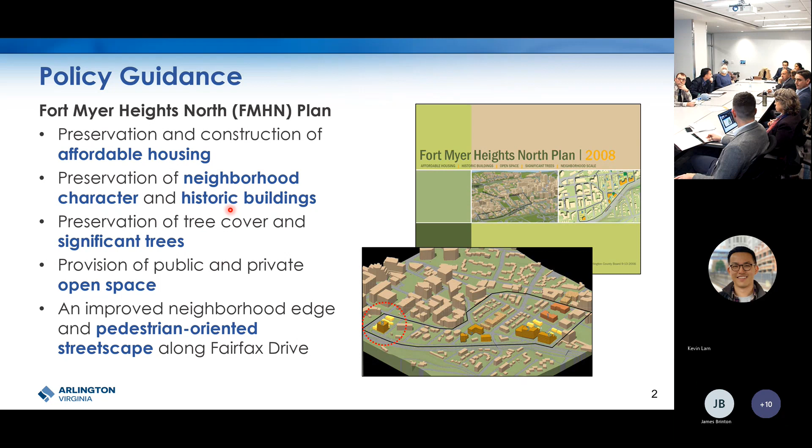The plan was adopted in 2008 and arose out of concerns that new development was eroding the unique fabric of this community. As a result, the plan has several overarching goals, including preservation of affordable housing, neighborhood character and historic buildings, and preservation of trees and significant tree cover. It also calls for public and private open space, as well as an improved neighborhood edge and pedestrian-oriented streetscape along Fairfax.

The project is identified as Block 8 in the plan as likely to redevelop. It's recommended that the 3 historic properties currently existing on the site are preserved. As part of the original site plan approval, the buildings were indeed preserved in exchange for a transfer of development rights. The plan notes that given the limited developable area on the block, flexibility with regards to other plan and county recommendations may be needed to make redevelopment of this site financially feasible.

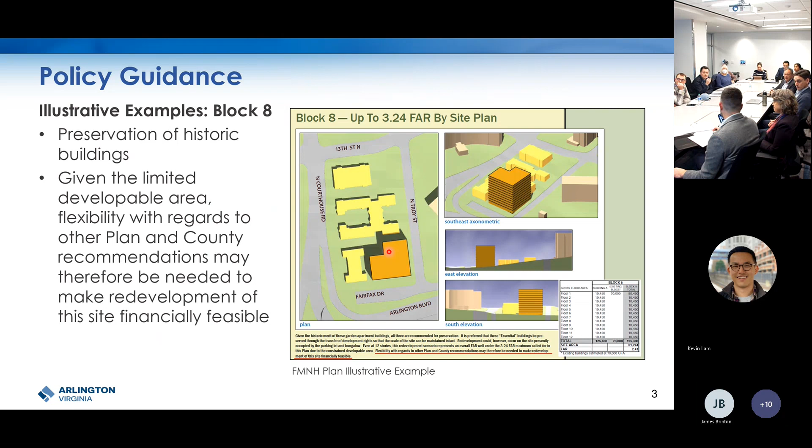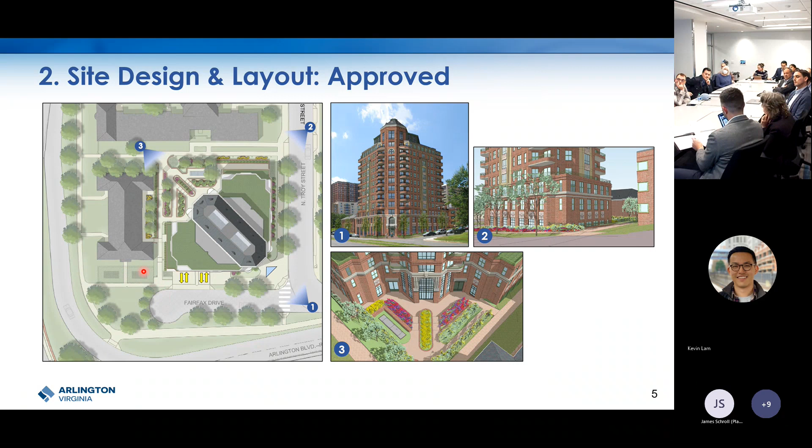Here is the approved site plan layout. The approved site plan was oriented towards Fairfax and Troy, with the main entrance located on the street corner. Parking and loading access was off Fairfax Drive, with walking paths surrounding the new building. An at-grade terrace garden was located in the rear of the property and sloped down towards the new building, providing direct access out of the new building north towards the courthouse area and the metro. Other features include sidewalk improvements around the entire block, as well as reconfiguring the existing Fairfax Drive dead end area into a cul-de-sac. The underground transformer vaults were to be located here in front of the Wakefield Manor building on Fairfax Drive.

The proposed building is oriented in a similar fashion, with the main entrance also located at the corner. There is parking loading access off Fairfax Drive, as well as an additional parking access point on Troy, exclusively for the mezzanine level parking. Unlike the approved plan, the applicant is proposing an elevated private terrace located on the second level, which doesn't have direct access to the ground level. The applicant is still providing the sidewalk improvements around the entire block, as well as the Fairfax Drive cul-de-sac, and the underground transformer vaults are located in the same location, but this time enhanced with landscaping and hardscape.

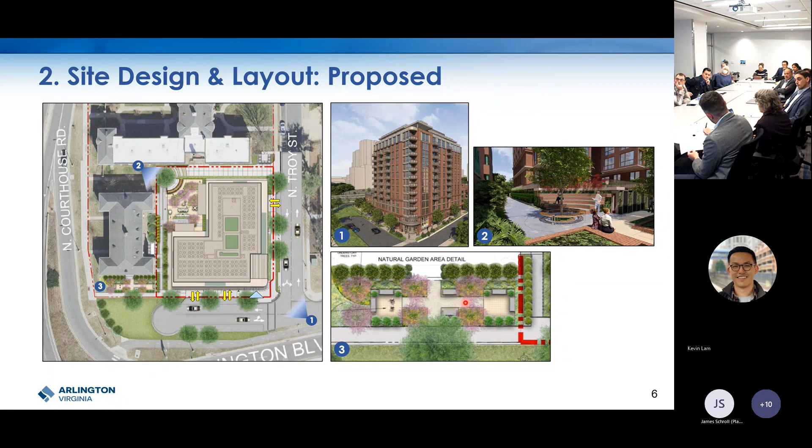Another key component of the plan are the design guidelines, which include recommendations for new development being inspired by colonial revival or Art Deco styles. They should include appropriate tapers and setbacks compatible with the neighborhood scale, and new development should also incorporate step backs along Fairfax Drive of at least 15 feet starting at the 4th floor. Here are some images of the existing properties.

So we have Courthouse Manor, and then the Wakefield Manor properties here. As you can see, these buildings have a lot of architectural detail, but are also characteristic of the low-rise garden apartments in terms of massing and scale.

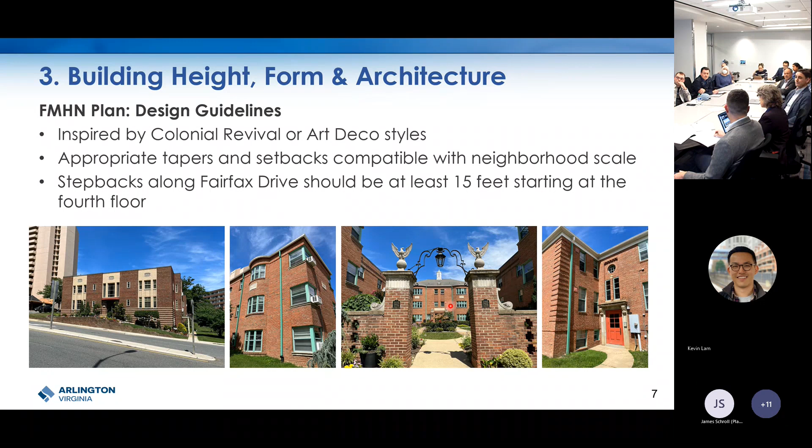So this next view is looking west. Fairfax Drive is located here. On Fairfax Drive, in both cases, there is no 15-foot step back above the 4th floor as recommended by the plan. On Troy Street itself, the approved site plan has a 30.5-foot separation followed by a 5-foot step back.

However, the proposed building instead only has 18.5 foot building-to-building separation with no height transitions down towards historic properties. While the plan is not explicit in how much distance there should be between buildings, it does recommend new buildings provide appropriate tapering down to lower scale buildings and setbacks compatible with the neighborhood scale. Staff have raised concerns about the new building being sited too close to the existing properties, especially on Troy. It even deviates from what was originally approved, as well as the lack of a step back.

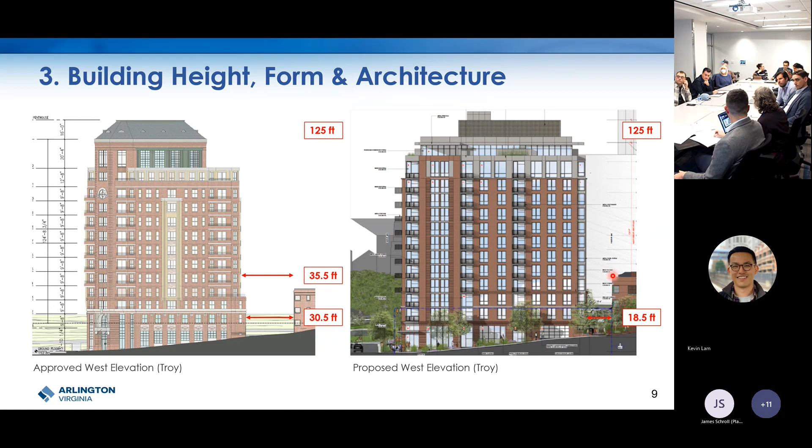So here I wanted to illustrate the point a bit further. For visual purposes, I pulled a few examples of building separation between recent new development and garden style apartments or townhomes. The first example is Union on Queen, also located in the Fort Myer Heights North area, which has a building-to-building separation of 32.5 feet with a step back above the 5th floor. Next we have Sedona Slate, located closer to the Rosslyn area, which has a 29-foot separation with no step back.

And then finally, we have 672 Flats located in Ballston. This project has a 22-foot separation between the new building and the adjacent townhomes. Also, it has a step back above the 1st floor. And I just wanted to note this driveway width here is 12 feet.

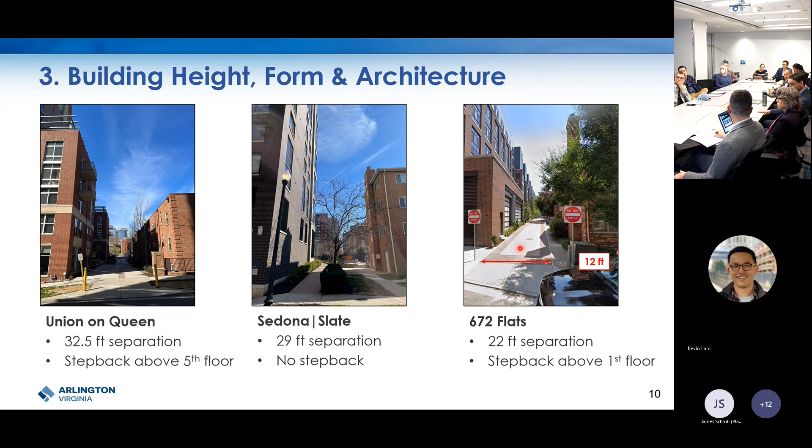So another component of the plan are recommendations for open spaces and significant trees. Per the plan, open spaces should evoke the garden apartment aesthetic of open lawns and trees. The spaces should be clearly viewed by residents and passersby, creating a sense of openness. It also strongly recommends the preservation of significant trees or their replacement per the county guidelines.

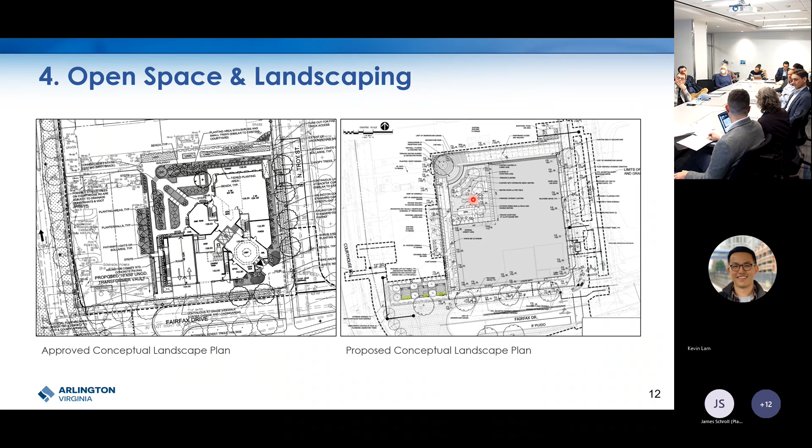Taking a closer look at the proposed courtyard, it's approximately 2,400 square feet. It includes seating, some outdoor grills, and planter beds. And from this view, you can see the courtyard is at least 7 feet above the ground elevation on this side.

So overall, especially compared to the approved plan, staff are concerned the proposed elevated courtyard does not meet the intent of the plan guidance related to creating a sense of openness and keeping with the garden apartment aesthetic. Staff are looking into ways to further soften this edge and increase permeability with the rest of the site.

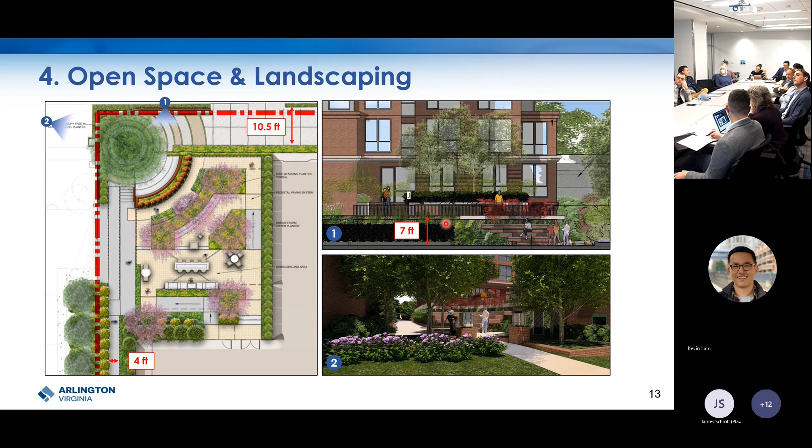Thank you very much. My name is Andrew Painter with Walsh Colucci, working with Fortis on this 4.1 site plan amendment. We're pretty excited to be here tonight. This has been a long time coming, not only for Fortis, but to actually realize development on the site in accordance with the Fort Myer Heights North plan policies and bring this project to fruition. Matt Bunch is the vice president with Fortis, and I thought I'd ask him to share a few words about the work he's been doing with the property owner and some of the issues we've been facing.

Yeah, thank you for your presentation. We're very excited about this project in the neighborhood. We think it's a wonderful block, and we think it's an ideal location within the county for new transit-oriented housing. As we've alluded to, it is pretty uncommon for a project in the county that's approved for multifamily to not get built for over a decade.

So we've understood the challenges that have prevented this project from moving forward, and we've gone into the process eyes wide open. We put together an excellent design team over the last 2.5 years, working through various obstacles that prevented it from moving forward. We think we've come up with some creative solutions to finally bring it to fruition, and we look forward to working with the community to get this project over the finish line. So what I thought we'd do is have a bifurcated presentation.

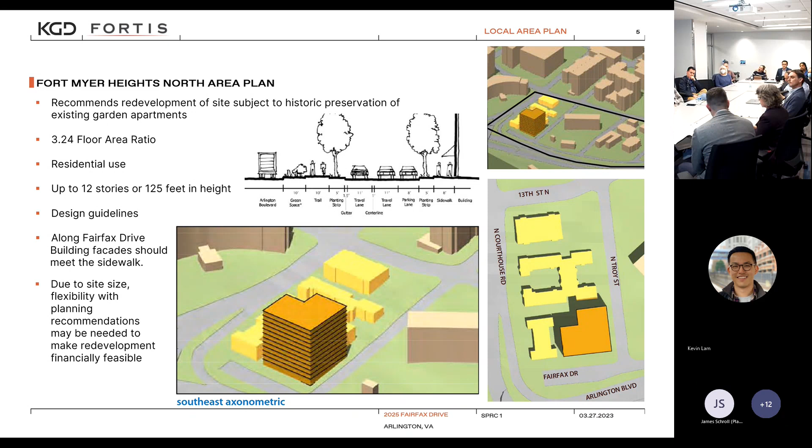There are a series of design guidelines Kevin mentioned, such as orienting the building towards Fairfax Drive, incorporating colonial revival and Art Deco elements, and open spaces responsive to passersby, mainly on Courthouse Road, Fairfax Drive, or North Troy Street. At the bottom of the screen you can see the axonometric image - the massing has always considered this shape and height, which our proposal seeks to replicate. That's the guidance we're trying to meet.

What was approved back in 2011 was a 12-story building, 104 units, about 105,000 square feet of residential GFA. It included the historic preservation of the existing buildings and the transfer of development rights. There was about 4,700 square feet dedicated to on-site affordable housing.

Under the Fort Myer Heights plan, anytime you take it through a 4.1 site plan, you have your base affordable housing contribution, and then a special on-site affordable housing contribution - in this case 4,700 square feet. In most 4.1 site plans there's bonus density, providing an additional opportunity for affordable housing. But what they did in 2011 was back into the amount of density so that there was no bonus density, meaning no additional community benefits above the base contribution amount. That was the extent of the affordable housing contribution.

There were a series of problems with the prior approval. Fortis has gone through a series of geotechnical studies, looked at the topography and the size of it. As we mentioned in our initial video, there are issues with significant rock deposits and granite directly below the site - something you usually see in Rosslyn, but it's here too, which makes excavation and blasting very, very difficult.

There are a series of utilities running along the Fairfax Drive frontage that have to be relocated - a spaghetti of different wet and dry utilities. There were issues with the interior layouts of the proposed building and the exterior facade elements, which were not environmentally friendly. All of this contributed, we think, to the building not being financially feasible to construct.

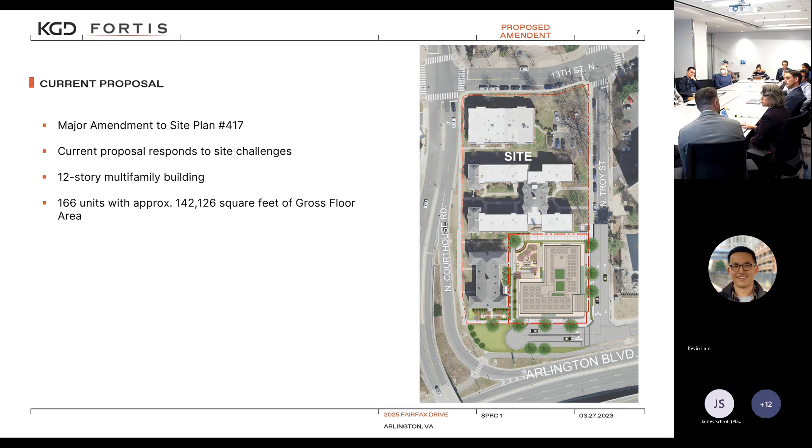166 units, 12 stories, just like the prior one. There is an increase in density from 105,000 square feet to 142,000 square feet. And we do seek to respond to a lot of the site constraints that we've identified. So with that, I'll turn it over to Tylene for a walkthrough of the design and massing of the building.

Hello, it's a pleasure to be speaking with you tonight. So we'll start with sustainability. We are working under the new Green Building Incentive Policy.

So we will be meeting LEED V4 new construction gold with 20% energy benefits and all the other prerequisites, including the EV parking and EV ready, bird-friendly materials, biophilia design, and Energy Star and WaterSense appliances and fixtures.

We will be going for a bonus FAR of 0.35 with 3 extra items, which in our case will be the envelope commissioning and air leakage testing, building life cycle impact reduction, and the procurement of off-site solar renewable energy -- 3 points, because we have a very small, tight site.

So this is the site plan you've seen -- slow, but there you go. You've seen this already in Kevin's presentation, and so I will just keep on moving.

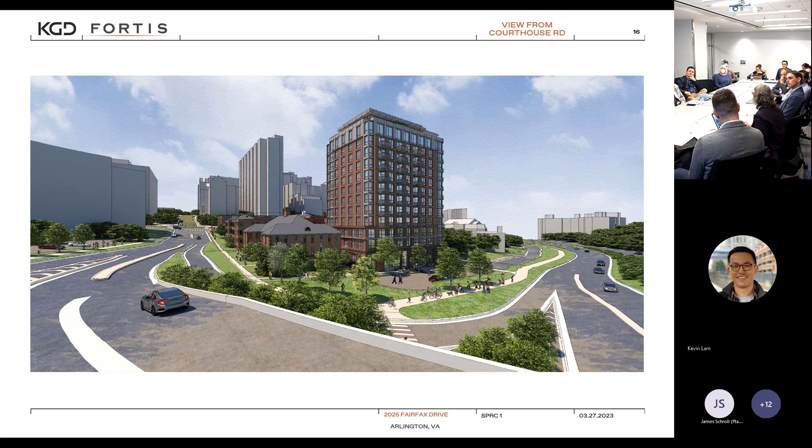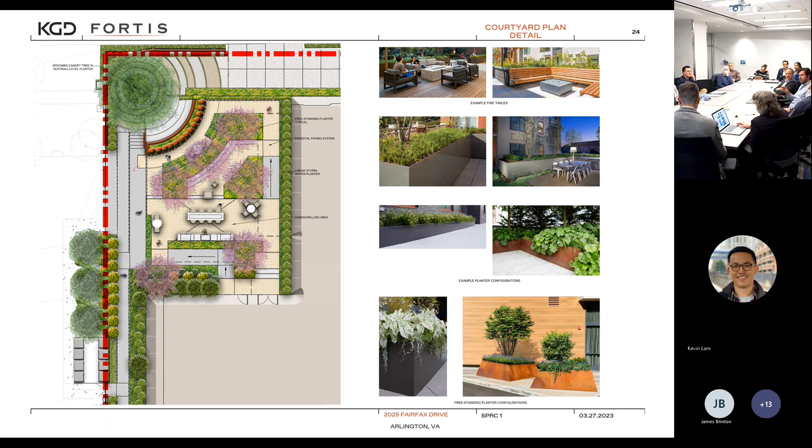I have a clarifying question about the parking—instead of 30 parking spots for the existing residents, is that completely separate from all the others? Yes. They don't connect—there's no connection between that level and the other level. It's really the only way to do that. Is there a section of that anywhere, like online?

Because I saw the drawing—so for those at home on the screen, just to clarify, this is North Troy Street. See where the arrow is to the right, and then there's a red arrow that goes into the upper level of the parking. That's at grade, pretty much at grade with the pathway and the exterior where the tree is. There's a direct line for convenience on that level for people to exit directly right by the tree. Then this is two floors down as you come down—162 feet up to the entrance at Troy Street, and down on Fairfax, 150, essentially 155 feet. That's a big difference, right? So this goes under parking for the existing residents.

Okay, and bicycle parking on G2 and G3, that's only going to be for the new residents, right? Yes, current residents are not going to have access.

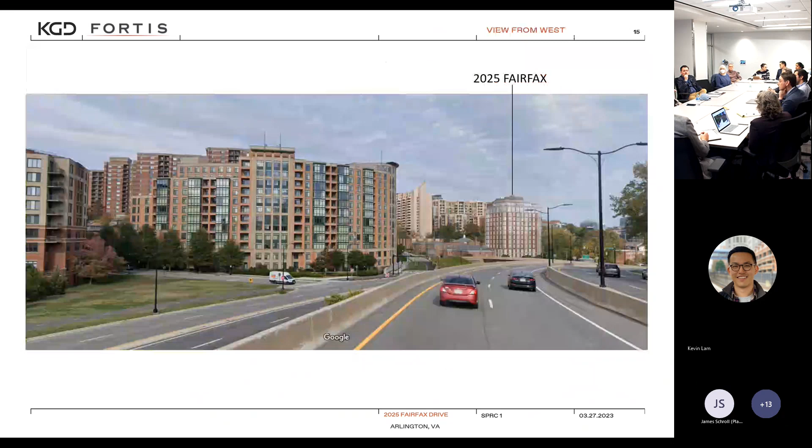One of the challenges with the property, as I mentioned before the meeting started, is that when they redid the off-ramp for Arlington Boulevard, they took away what used to be the street. So for deliveries or even telling people your address, it's really complicated if you live on North Courthouse Road at the bottom, because no one can stop there, and everyone has to go around to North Fairfax. That's going to be very complicated when everything's under construction.

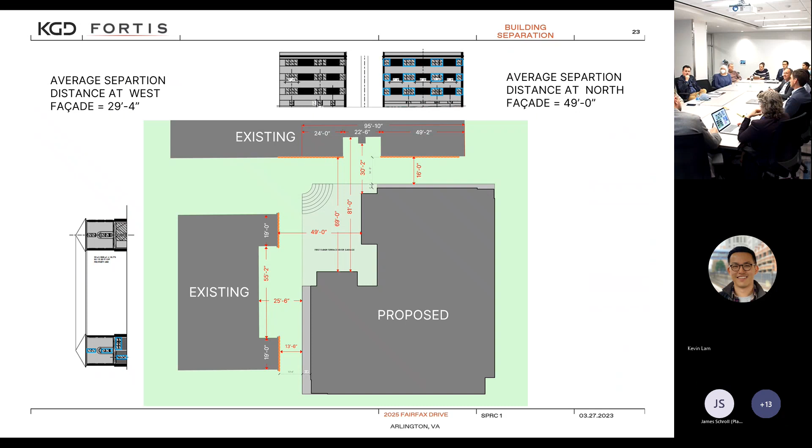How do people get to my home, or how do I get to my home for living there? I know you mentioned deliveries, but also think about the people who have to rely on North Fairfax Drive currently, because they don't have North Courthouse Road as an option. Same thing for Uber, Lyft, stuff like that—a lot of those residents are dependent on that street for all those types of services.

Okay. Are we ready to move on to the next topic, which is site design and layout? Getting some consensus on that. Okay, site design and layout, the next topic.

Leo, did you have— James, you have your hand up. So James, take it away. So with regard to the partially above-grade parking garage, the portion that's on North Troy, how are we making sure that facade in that portion of the building is a safe pedestrian experience? Can you talk through how you're lighting that space, the portion beyond the lobby? Can you just talk through what you're planning right now?

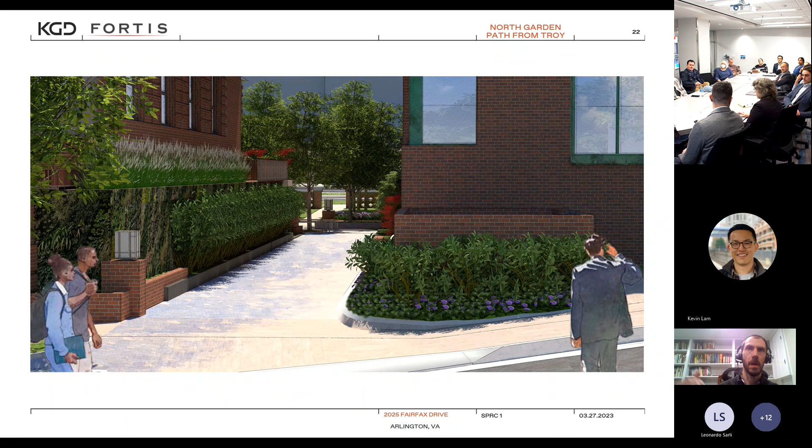Yeah, you're talking about the area in the photograph? No. So the Troy entrance, the other side. The Troy entrance, yeah, the east facade. Also, as you're pulling it up, it'd probably be easier to talk through it as you're walking down the building from the other entrance.

I guess as you're doing this, it would be helpful in the future if you actually numbered your slides. My slides are numbered, but they're small. I agree with you there. All right, where would be a good slide? 6. This is 19. 18 perhaps. This is fine.

So you're wondering what you're doing here to have eyes on the street, to make this a safe pedestrian experience for people walking through, since what's behind this is parking, correct? No. The only part of this you're seeing that is parking is the parking entrance up near the Troy access. That's the entrance; the rest is open to the lobby, and there's a 2-story lobby, so that is definitely lit from both inside and on the street—that would be eyes on the street. That is not parking garage open; you can't see into the parking garage from Troy.

Okay, that's helpful. Appreciate it. It might be helpful for the next meeting to get a better visual on what that experience will be. I'm not sure there's a slide that fully conveys it. I appreciate James pulling the thread on that because I think it was hard to tell, so maybe a slide that better addresses that for next time.

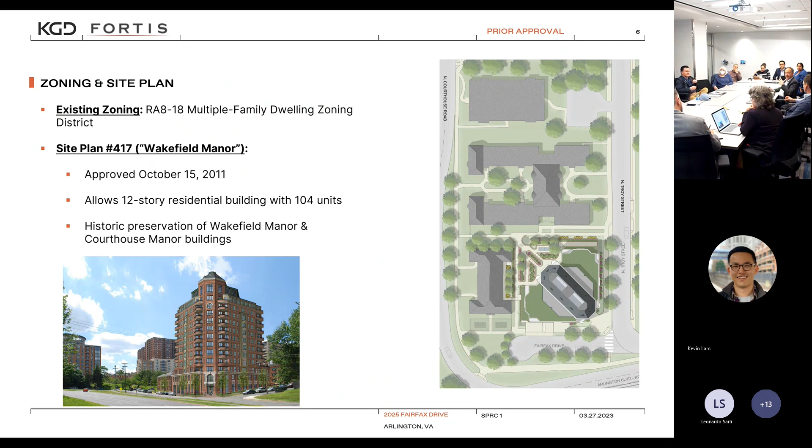One of the things, I was on the HALRB when we approved this site plan way back when, and one of the greatest things of that site plan was the way it complemented the current structures there. It looks like a modern building, but it really reflects the structures. And one of the ways the previous architects, or maybe it was you guys, did that was with the roof line, and you kind of abandoned that roof line. I wonder if you gave any thought to keeping that element, or if that's just a non-starter, keeping the roof line where it was, reflecting the old.

So we've made an occupied roof. We've really made the views from the top of the building, which are going to be amazing, accessible both to people who live up there and as a residence amenity on the roof that has both exterior and interior space. As opposed to having a cupola that's rather restricted in interior space and ability for somebody to occupy it, we've really expanded that, made it much more democratic, so you can actually see views and look downtown. So it's really about changing the experience of the inside.

And correct me if I'm wrong, but I think those penthouses were 2-story penthouses. Yes, they were 2-story penthouse. And when we originally submitted our plans, it was a lot more Spartan of a structure. We then went in the opposite direction, added too much ornate detail, and then staff brought us back to sort of the middle, where we're at today, with a focus on things like curved balconies and brick rustication, horizontal masonry accent bands, but keeping brick as the predominant building material, doing the window treatments and things like that. So it's kind of trying to thread the needle a little bit.

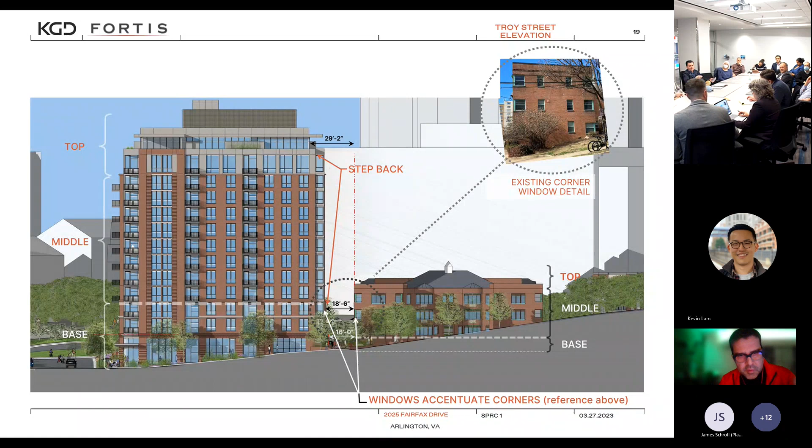I think it's leading to a bit of the confusion you're hearing from the community, where we're not quite clear where the entrance is. So, for instance, the activation of Troy Street or Fairfax and how that corner wraps around and brings the attention into itself, I think needs to be addressed or looked at. It's a little bit weak right now.

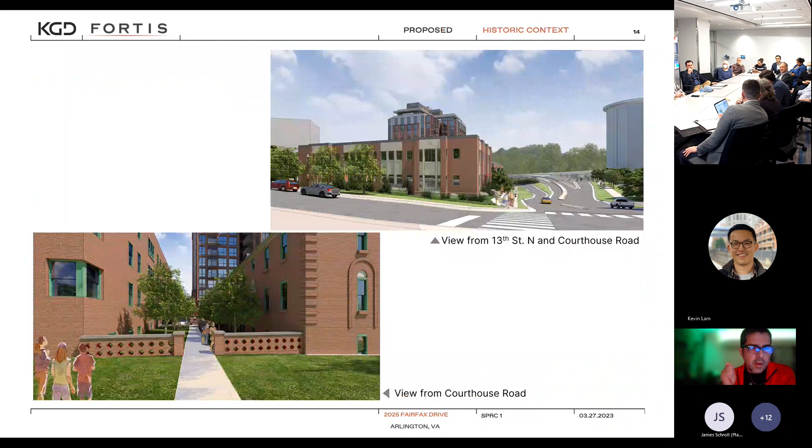I want to echo staff's comment about less is more, in a way. A lot of the brick detailing is interesting and good to pick up on, but be careful what you wish for. If you start getting ahead of yourself and bite off more than you can chew, and the details come a little less crafted than they would have been in the 20s and 30s when this was originally built, it sort of smacks of that knockoff, imitation thing. You have to be careful that the details reference things, but don't pick up on them too literally. Just be concerned — I really want to echo staff's comment on that.

But I think my biggest difficulty with this building right now, architecturally speaking, is that corner entrance and how it's not clearly defined. You almost need a sign, and in my architectural practice we try to approach it so that if you have to put a sign, the design hasn't fully carried its weight. If you can do it without a sign — and I think a corner entrance should be doable without a sign — I think it's something you ought to revisit.

And I particularly don't like the asymmetrical balconies. I think you can have balconies on the corner, but you really need to wrap that corner in a way that's symmetrical, both from a historical precedent standpoint and for the significance of the entrance of the building. Thanks, that's it.

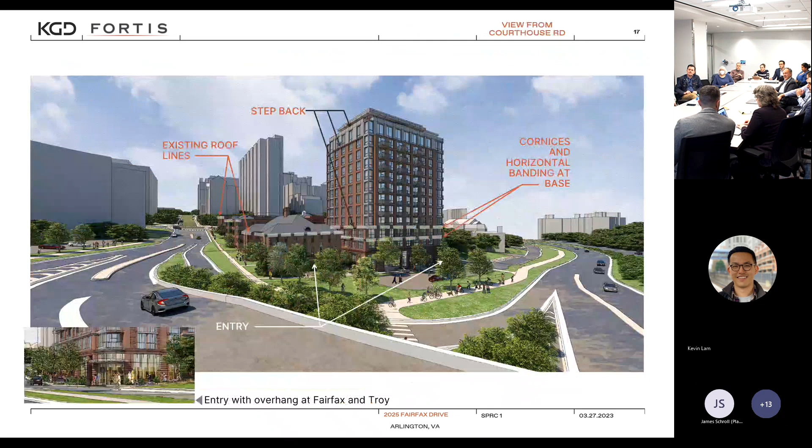We've got one looking up there. So the top one, looking, standing on the path that comes off Troy, looking south at the north side of the building. The top one, the top one.

It's going to be deeply planted. Those are hedges along there, so it's a very green path.

And you also want to have how the lighting is going to go so that it will always feel safe. There will be, it will definitely be. No, well, I understand that, but just how the lighting is going to be. Narrow spaces tend to be nervous, and foliage is wonderful, but also can make you nervous at night. So there's some sort of that just feels inviting to walk. I'm not sure I want to go through here. That's what I'm— point taken.

Thank you. Mr. Brinton? James Brinton, I saw your hand a moment ago.

Yeah, I just had another thought about the courtyard space. Is there any sort of guidance from either the county, like if we're going for garden style or having this openness, is that enough space for that many units and that many people? It kind of seems like it's not. I mean, it's echoing what the people just said before me, where it seems like a lot of units for that little garden space.

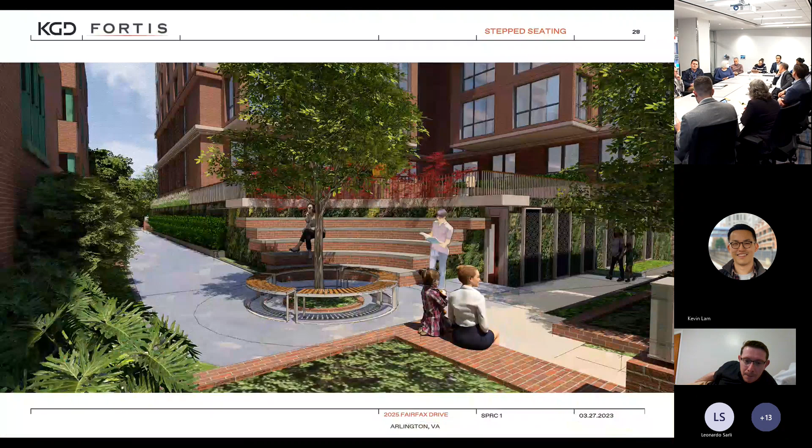Yeah, so in terms of the Fort Myer Heights North Plan doesn't specify how big the space should be for its residents, but at the same time the plan itself is trying to preserve the garden style aesthetic of open spaces that anyone can interact with. So there is guidance in that aspect.

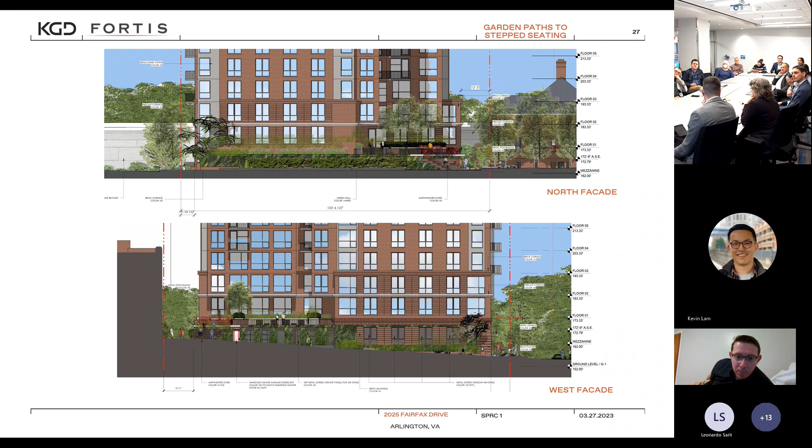Okay, my next question is on slide 26. This may be a small detail, but I find it very important. I'm married to an arborist, so I see and hear a lot about this. I don't know if this is just an artistic rendering, or what type of trees those might be, but do you know if there's an arborist consult that will be making sure those trees aren't going to grow too huge? They're really crammed in there, and those trees, if they're an oak or silver maple, can get so big, and that can become its own problem. Do you know if there's an arborist on site that will really choose the right trees and the right number of trees?

Yeah, I mean, our civil engineers selected the trees specifically for the size that they will become across the entire site. So we're definitely not going to put anything there that would get outsized or too big for the area. And if I may also say too — Jeff Krebs with ICA, I don't know if you're on, if you want to say anything more — but I've just got some numbers here.

But I guess in terms of the total number of trees being proposed, just by order of magnitude, the prior approval had 27 trees planted. I think we are proposing 29. And in terms of the total amount of open space, the prior approval had a little over 10,000 square feet, and we are a little over 12,000 square feet for the same features, I believe. The courtyard area, the section we were talking about that's just open to residents, is approximately 2,400 square feet. When you include everything with the pathways and the seating area where the canopy tree would go, it's about 2,800 square feet, and I think the prior approval was around 3,000 square feet or so, just for way of comparing it. Jeff, I don't know if I have that on.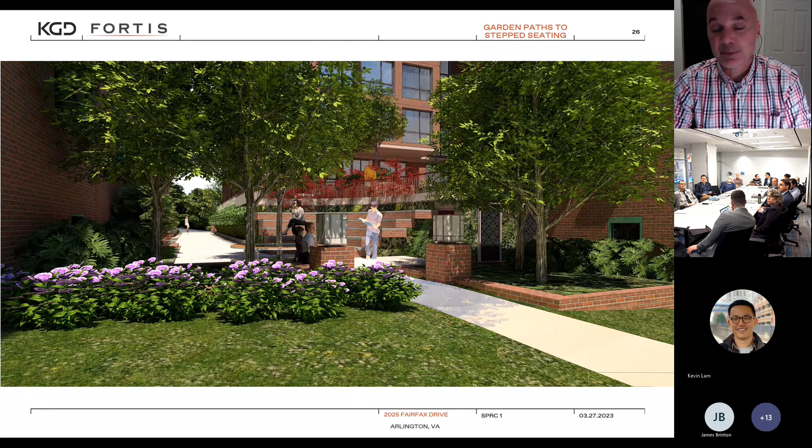No, I think, Andrew, I think you summed it up well. Just to answer more specifically the question, we do have a certified arborist on staff who has visited the site. He's conducted the inventory, and then I am a landscape architect, and we will certainly be selecting plant material that will be appropriate and will be, to your point, not too crowded, but gives as much canopy as possible. As you've heard many people say, it's quite a constrained site, so we're doing what we can with the plantable area that we've got. But I think, as Andrew mentioned, we're planting a couple more trees than the previous application where we can, maximizing all available space. And though the renderings may look a little bit artistic license, I think certainly the end result will be a plan that is very sustainable while meeting the canopy goals of the county.

Thank you. And one of the things I asked this slide to be brought up — one of the things that staff really pushed us on the prior approval — there's 2 electric vaults right along Fairfax Drive at the southern end of the site that were proposed with the prior plan.

That's the only place they can go, and there was no ornamentation or embellishment associated with those at all. Staff really pushed us to try to find a way to make those areas workable and usable, and a place that could be welcoming and dignified for people that are visiting.

So if you take a look at the prior plan and what was approved, and what this plan is, it's kind of a difference between night and day as far as found space. I just wanted to mention that, it should be pretty positive.

Sort of on the found space, there's also someone's front door right there too. So I don't see a lot of other people using that space, because even though technically it's open to everyone, it'll probably seem like that renter's space because it's right in front of their unit, and they're one of the few that has an exterior entrance just for their unit.

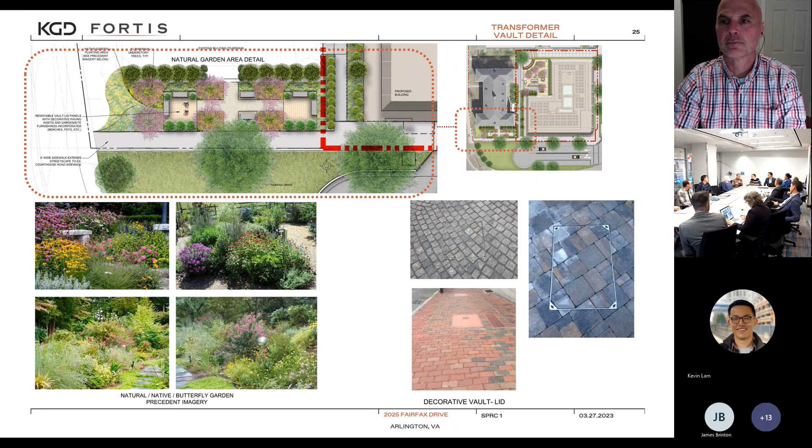Jim? Yeah, thank you for all of that, I was thinking the exact same thoughts at the same time, so thank you for raising that about the end of the cul-de-sac there. The next one, I'd like to know who actually owns that. Is it the county? Is it VDOT? If the county owns it, is it something that's under Parks and Rec?

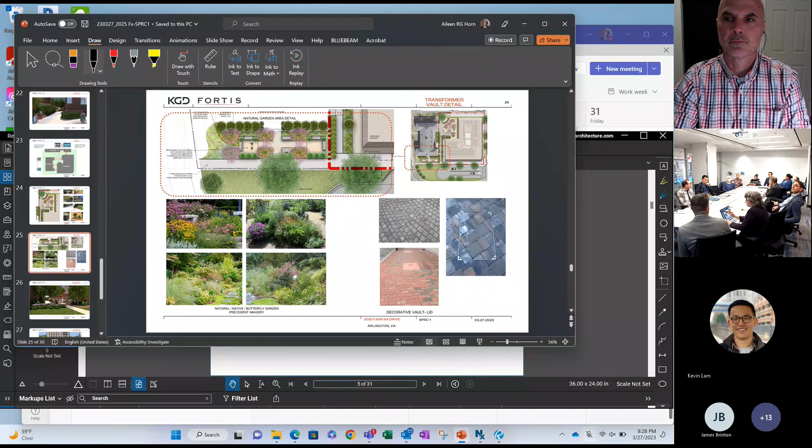Who has jurisdiction over that, because of the space, that question about how that can be done. We're doing that in Clarendon, on Irving Street, which is going to be a park at the end of that street. Same thing here, so there's lots of opportunity here. I understand why you can't necessarily put a big tree there, but there's lots of bushes, hedges, plantings, a rain garden could be there. Certainly benches can work there. Maybe that could be the dog space. There's a nice amount of space, it's not a tiny piece of property, and just throwing some grass and gravel on it is not the answer. It's not good for the building, it's not good for residents there, it just says all the wrong things about it, so especially if it's going to be public, we need to do something more.

I endorse that, and there was a question about the ownership. Jeff, if you have the ability to share the ownership thing, because it took us probably a month to figure that out, but we have a graphic that shows exactly where it is. I think it's DES that owns it, VDOT owns a very small sliver of it. I would love to show that, but I'm working from home so I don't have access to that particular graphic. The entirety of the green space at the end of the cul-de-sac north of the trail is owned by the county. VDOT owns just a couple feet north of the trail, and the county owns the rest of that.

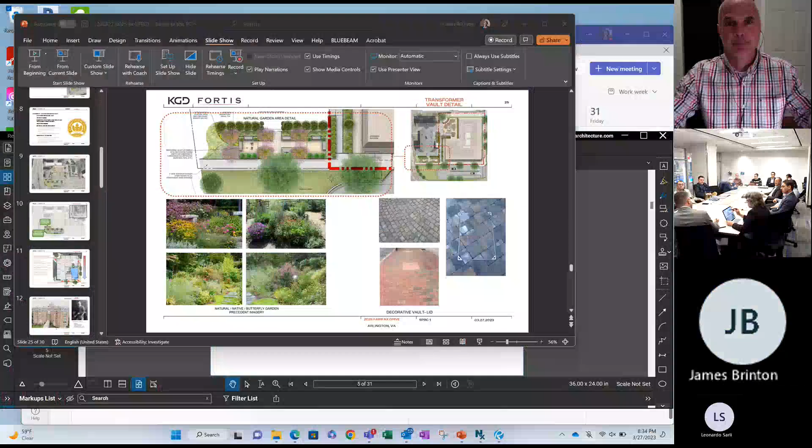That's also a Jeff question, but we aren't - along the Fairfax Drive side, that's where our loading entrance is going. Jeff, I can't remember how many spaces we are keeping on the trail side of the street there - are we preserving any of those spaces? Yeah, mathematically about 8 spaces, depending, just from a linear footage standpoint. As you know, the parking spaces are no longer striped, so it's just whatever you can fit in - perhaps 8 small cars, 6 Suburbans, that kind of thing. So there would be parking maintained on the south side, at least a little bit.

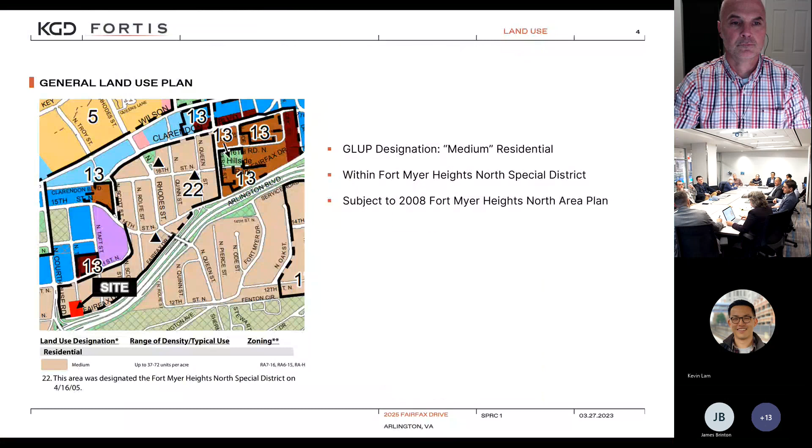So to the prior discussion about them going from 45 spaces a lot to 30, residents also rely on the street parking to fit their cars, and some of that's also going away. So for existing residents, they are losing a lot of parking because of this. I'm not necessarily saying that's a bad thing, but it is a thing that is going to impact a lot of people. And I know when I lived there, I barely drove my car, but I still needed some place to park it when I wasn't driving it because I took Metro most places. And yeah, that's just going to be a big change for people.

So that has been a constant refrain we've heard, not only from the residents, but also on the other side is the county's 2017 policy that seeks to reduce parking wherever possible in the county's metro area corridors. So it's this thing of actual lived experience versus what the county's policy believes to be the greater good, and how do we thread that needle?

That's been a constant struggle we've had to deal with. I know Dan Van Pelt and Jake Hernley from Gorove Slade, the traffic consultants, are online, and the transportation consideration for next time. My recollection is that our traffic studies showed 61% of the average trips would be non-vehicle related—pedestrian, transit, or bicycle.

Okay, right, exactly. But that doesn't deal with the long-term storage issue you're highlighting. So we're aware of it, I just wanted to let you know. Again, chair's privilege, you're correct—transportation is on the agenda for next SPRC.

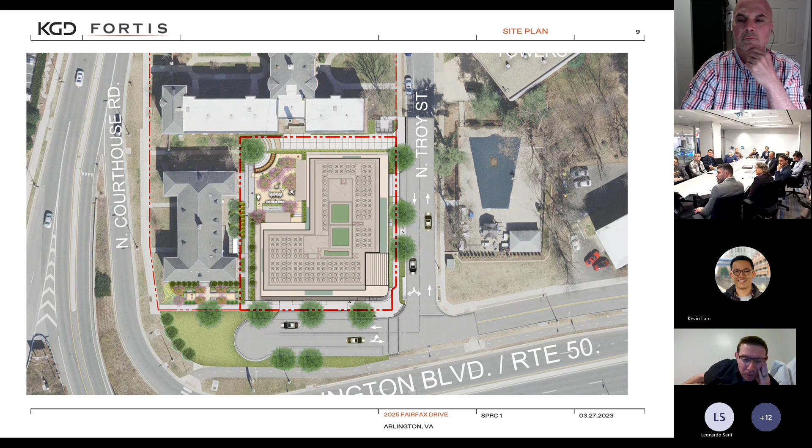Yes, I was just going to ask—has there been any discussion about where Wakefield Manor residents will park during construction, and how long that construction might be?

We can also punt that to the next meeting when construction is on the agenda. Okay, called out. All right, thank you, I'm good.

I want to second everything you said about the shade trees. This site gets baked during the summer. I lived in Wakefield Manor facing Arlington Boulevard for about 7 years, and the temperature within my apartment would go up by 10 degrees in the afternoon on a hot sunny day. They just have window air conditioning units, and they're not powerful enough to really cool it down. The cheap rents are great.

There's some other downsides about living in an older unit. While you guys are looking at the site, if there's a way to bring shade trees around even the front on North Courthouse Road—they have those little baby ornamental trees that provide zero shade. I think in general there's a lot more space on the site to provide shade trees; currently there are none other than that giant tree that's getting torn down, unfortunately. Over the years a lot of the bigger trees have been torn down and replaced with little tiny ornamental ones, so I think that would be a huge asset if that can be incorporated anywhere on the site.

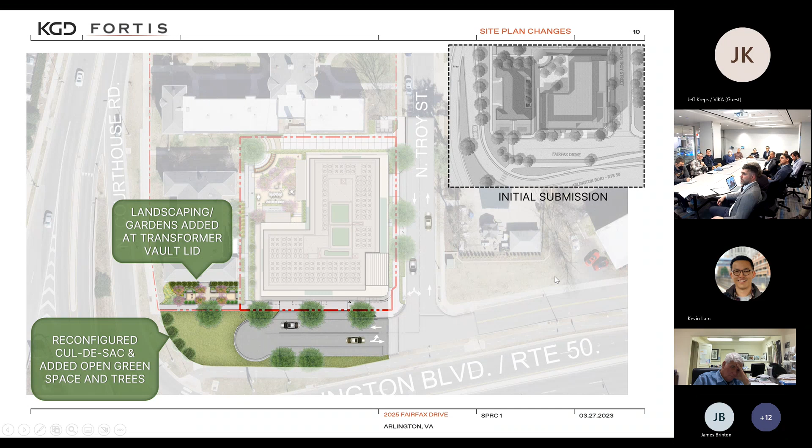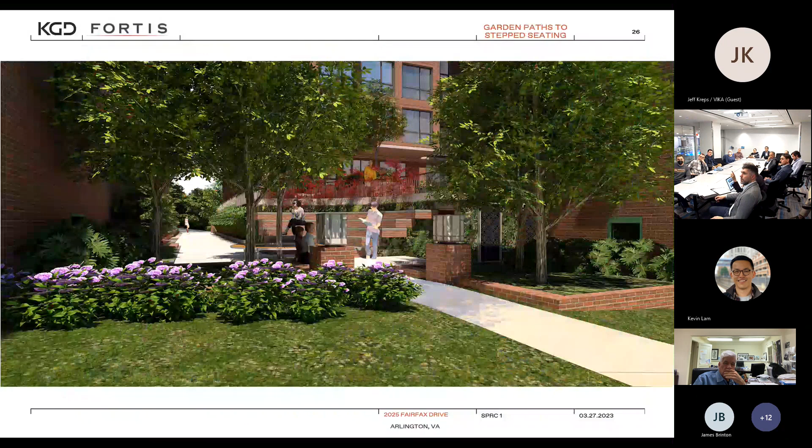The space in between Wakefield Manor, where it's narrowest, because I know there's a door that residents use to get from the parking lot to the laundry room and the rest of the units—did you have a picture of what that area was going to look like? I see some trees in there. There's an elevation on that side of the building, but not from the Wakefield side. This lower elevation would be facing the Wakefield Manor building.

We can also look at the plan because there's work being done there—right now there's garbage being collected there, so that's also being addressed. Basically it'll be a sidewalk with some trees lining it. But it is pretty tight, and I don't know if there's much that can be done about that.

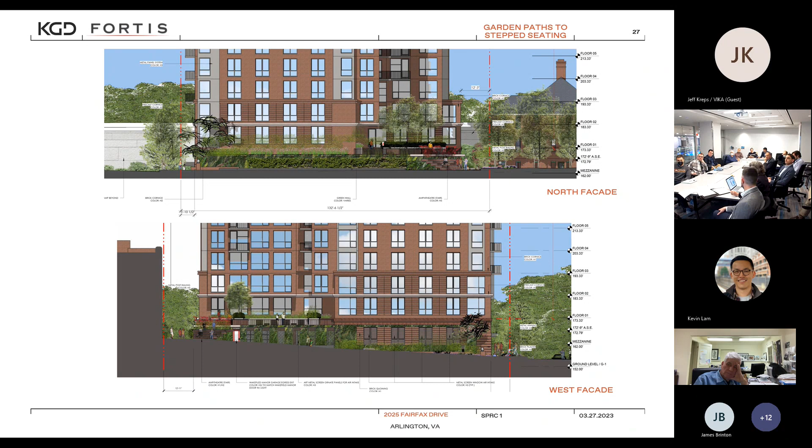Okay, so at this point we're getting close. I want us to reserve time for public comment. So this is last call, last comments, final thoughts from the SPRC group.

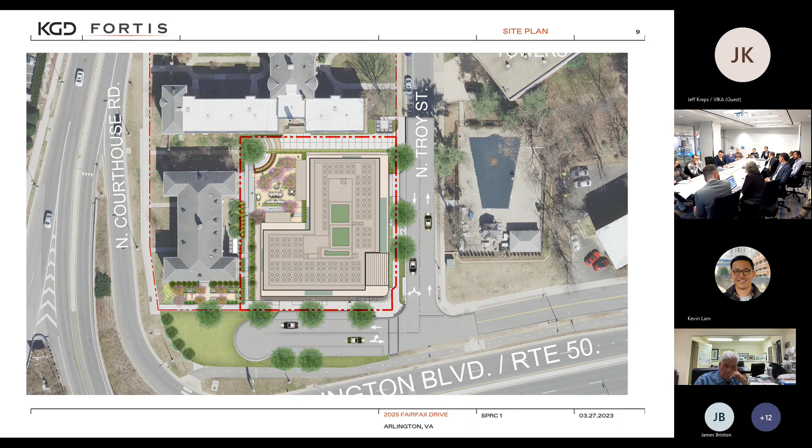Hi, can everyone hear me?

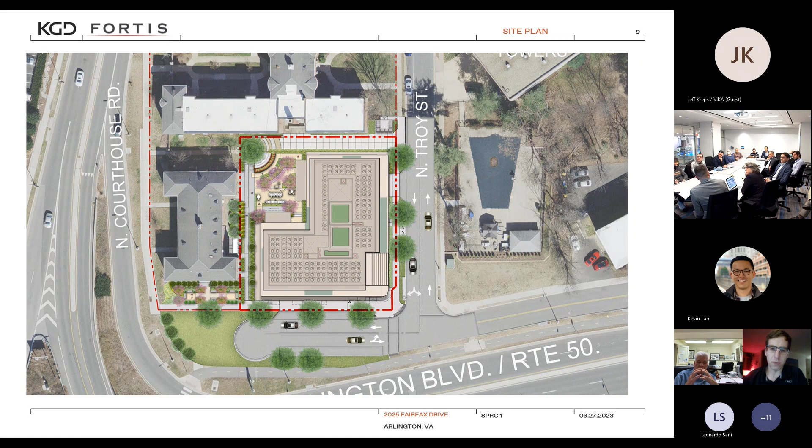Hi, my name is Jason and I live in Taft Towers, just across the street, and my apartment faces Arlington Boulevard. I love living in this neighborhood. It's really convenient, just a 6-minute walk to the metro, and really quiet besides the vehicular noise on Arlington Boulevard. Right now, the site is really horribly underutilized. There's limited pedestrian traffic, and the parking lots create an unsightly dead zone. The new site plan has better entry-level integration onto the sidewalks with a more functional green space.

I echo the comments made by people on the commission that hopefully that green space can be used for the community as a whole, not just residents in the building. I think the massing, height, and density are appropriate. The site is much less imposing than Woodbury Heights and the surrounding buildings, which are much taller. The current space between the site and Wakefield Manor is just concrete and a trash dumpster. There really needs to be welcoming spaces along Troy Street that cater and center to the pedestrian. The site needs to focus on people on foot and bike, not on cars driving along Arlington Boulevard.

I don't really support investing much into architectural detailing on Arlington Boulevard, because why do we care what people think driving in their car? They're not going to be looking up from their car to see what's going on. And people in the Fort Myer too, we shouldn't really cater to what their sight line is. We should be focusing on people walking around the site.

Just a note, 13th and Troy would be a great space for a Capital Bike Share station. I've taken 364 rides on Capital Bike Share in the past 2 years.

Also, there's been a lot of comments on trees, and I do like that there's trees, but safety has got to be a priority, especially on the curb cuts. When I walk up Troy Street, there's tons of curb cuts and people coming in fast, so we need to be careful that the trees planted are not blocking the sight lines. I love shade, I love all that, but we can't have big giant trees blocking the sight lines and creating pedestrian conflicts.